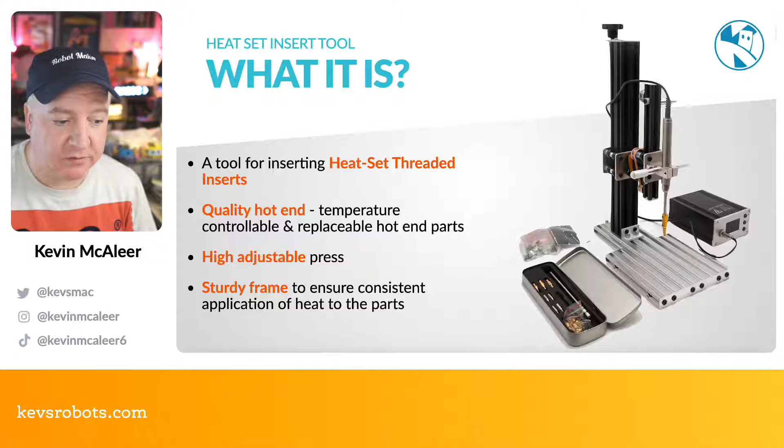So what problems is this trying to solve then? So this is for 3D printed threads. So if you have a part such as, I'll get one of my BurgerBots here, for example, I've got these little motors that I want to connect.

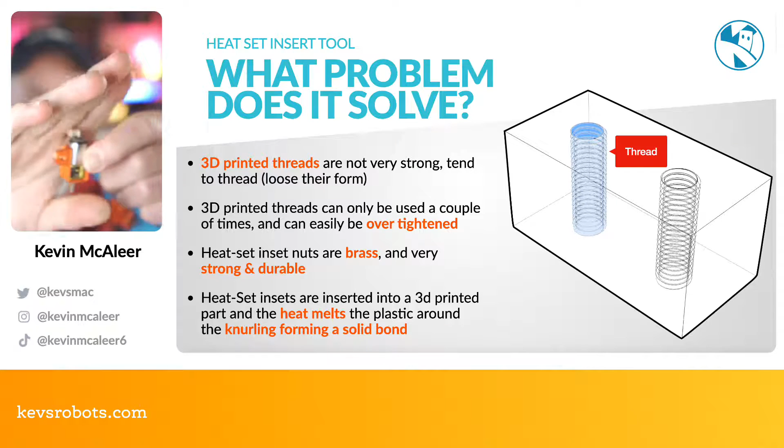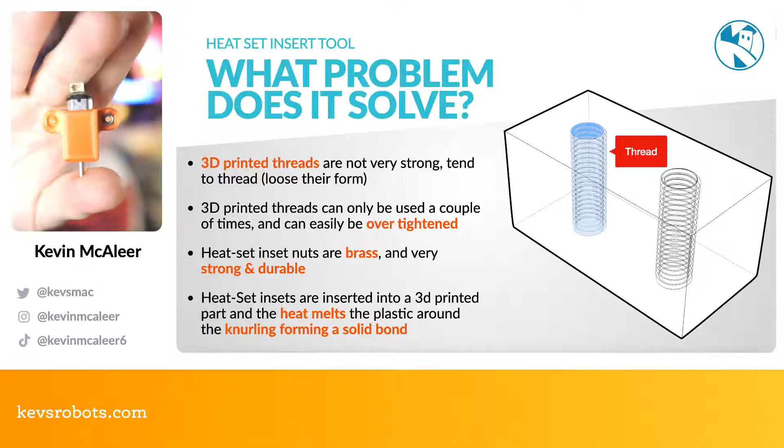There's a motor which you can see there, if I just cover up my face and hold that there. You can see I've got a little motor and I've got a little 3D printed holder part, and it's got two little sort of wing nuts on there, and the idea is that you can put a captive nut into this and then screw this onto something like this BurgerBot base here, so that you can attach a wheel to it. So that would actually be for the other orientation. So you can put this on here and it's got the little wheel thing on there.

So the way that I can connect these two parts together is basically just using a captive nut. So a nut on one side, a screw hole, and then it squeezes the two together. So one of the challenges there is if you don't have the size of the hole correct, then the screw will move around and you won't get a nice join there. Or if it's too tight, you try and squash it together, you can end up cracking the entire lug nut there. So that's not really what you want to do.

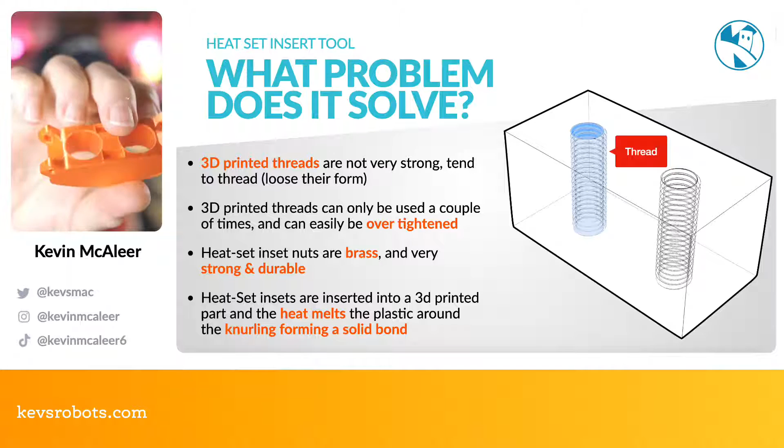And I've had this happen on quite a few of these BurgerBots where I've got these kind of up and down sort of lug nuts. If I just show you that there. So there's holes for those captive nuts, little hex nuts, and the top and the bottom of this attach through using some holes and some M3 screws I think I used for this one.

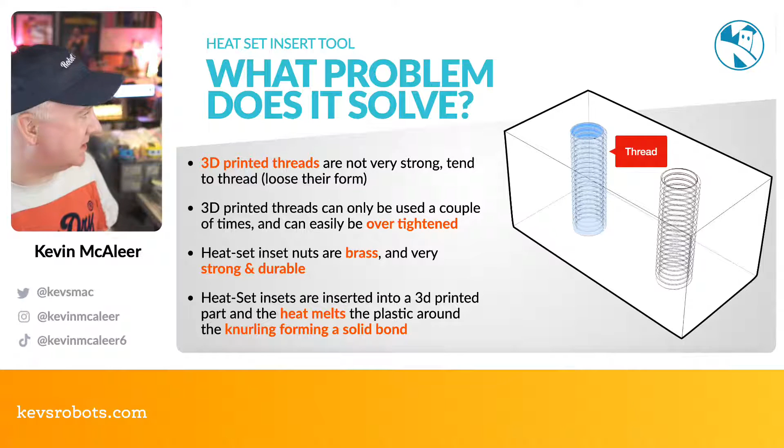So one of the problems with trying to use 3D printed threads: you can tap threads. I've got a tapping tool just on my workbench over there, and essentially you can get a hole with no thread in it, put this brass thing in and it'll create a thread. But threads on 3D printed parts don't tend to last very long. You might get one or two goes at it before you've basically heated the plastic up internally and it's just loose.

So if you want something that you can take off and put on many different times, you want something that's a metal based threaded part. So this will solve that problem by giving you a threaded part that's made of brass, so you can screw that screw in many different times, and it's connected solidly to the 3D printed part. The other thing with the threads, if you over tighten something, you'll essentially just strip the internal thread of the 3D printed part, and again these brass ones will get around that issue. You're unlikely to over tighten it to that extent on a 3D printed part.

So the heat set inserts come as little nuts. I've got a whole bag of different size ones here. So these ones are, I think, M5 ones. So you can just see in there, there's little brass things. We'll have a look at one closer up in a second.

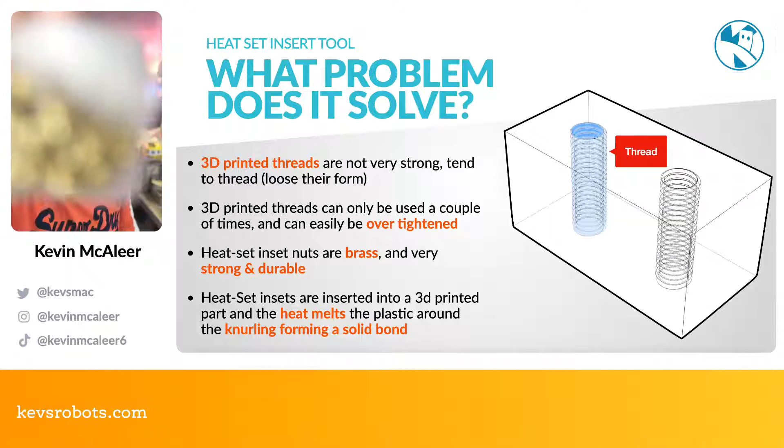You can also get even larger sizes, so I've got a slightly larger bag of them there. And they're very cheap. I think these are the M6 ones. These are absolutely huge. So you can see these ones here as well. So they're getting larger in size. But you can get very small ones too. So they're very strong, very durable, and perfect for, again, putting two different 3D printed parts together with a really solid connection.

And the heat set inserts are inserted into a 3D printed part.

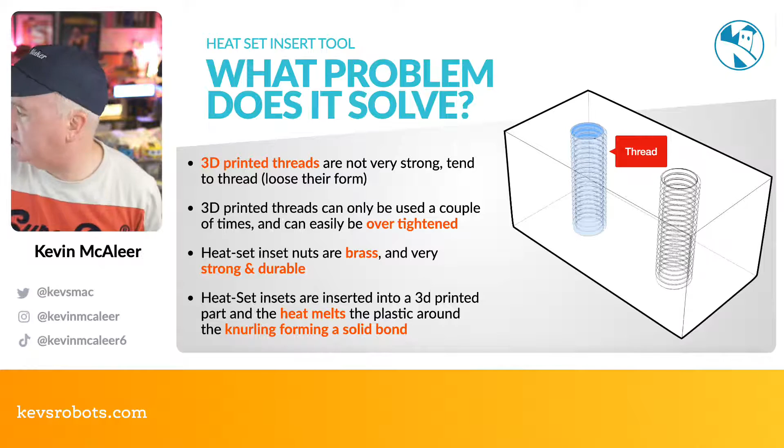And they use heat to melt the 3D printed surround ever so slightly, just enough that the 3D printed filament will come against this knurling on the heat set insert, and it will then make a solid join as it cools back down. It basically forms around it and it doesn't go anywhere. You can't twist it or anything. So that knurling, these funny little diagonal stripes around the edge, form a solid bond with the plastic that they're set into.

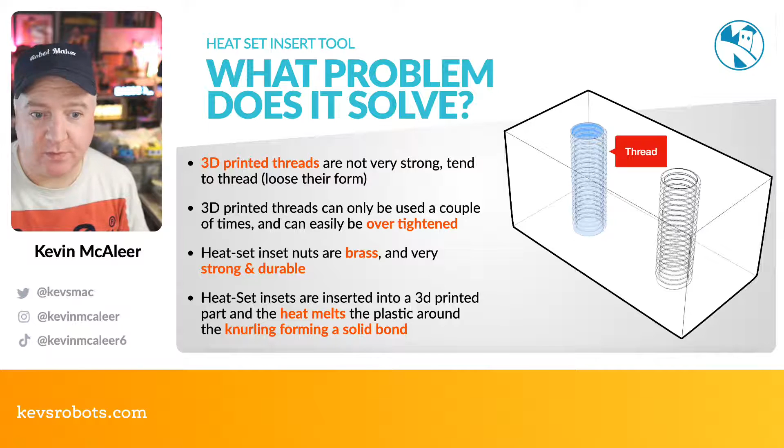It's quite difficult to explain that. I think it's more intuitive when you see it. You're like, I get it. So this is one of these HeatSet inserts. So it's brass, or other types of metal are available as well.

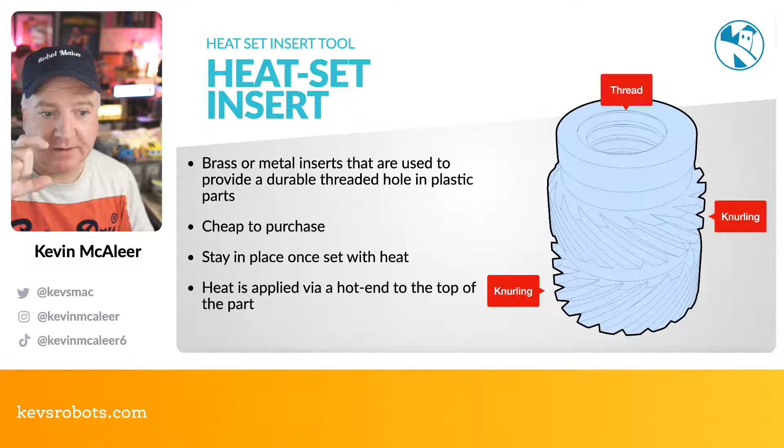And you can see there they've got an internal thread, which is where you put the normal bolt in, and on the outside they've got these knurling patterns, and they've got them in opposite directions so that the plastic, when it sticks to it, it doesn't matter which way you turn the screw, it's going to hold it solidly in place. They're very cheap to purchase in large quantities, and the heat being applied from the hot end basically just touches the part. We can see that on the next slide.

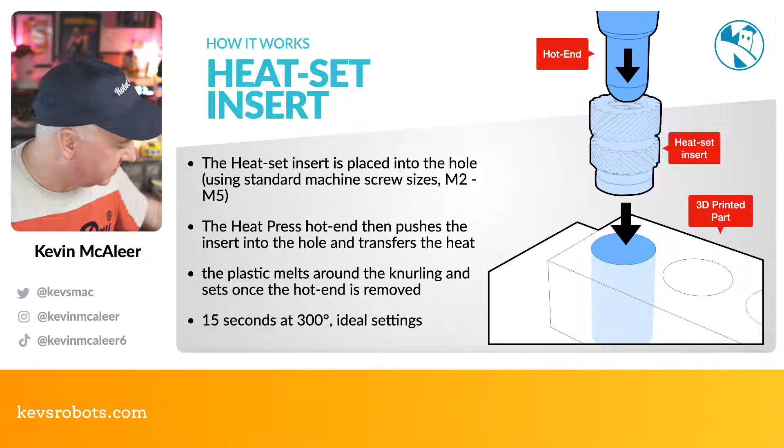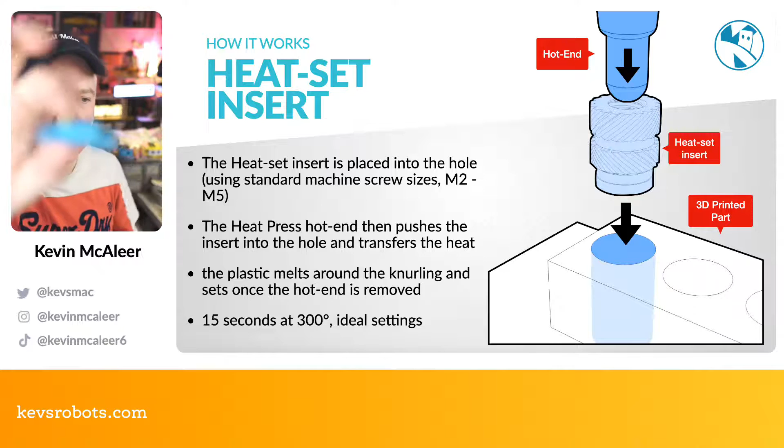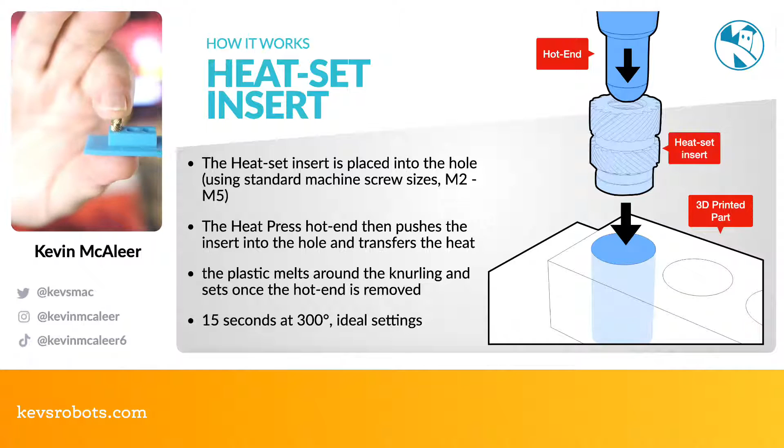So this is how we actually use it. I've got some I've made earlier. Let me just get this little part here. So I've got these little test 3D printed parts with a couple of holes in it, and we get our little heat set and we put that inside like so. We basically just put it slightly inside the part. I need to see if I can do that without dropping it. It's quite hard to do. So if I do that, you can see it's just sat slightly inside, and that's because there's a little piece just above where the knurling starts.

So you put that into the hole, and the hole is the same size as the screw that you would intend to use. So if this is like an M5, the hole is an M5 sized hole as well. And they go from M1.4, I did just drop something then, to I think all the way up to M6, something like that. And there are different sized nozzles, hot ends, that you get with this particular heat press, so you can interchange them as needed.

So you can see there, you put that there, then the hot end comes in and transfers the heat into the little HeatSet insert, and then that pushes very gently, with very little force, to be honest, into the 3D printed part. At that point, it will then lock in place when you remove the heat. It'll sort of seal back up. So the ideal settings there will be about 300 degrees C for about 15 seconds. It's more than enough to heat the plastic.

So Shemi says, can you drop your open box of inserts, please, just for a laugh? That might happen by accident. These ones luckily are all sealed, so that's not going to happen. But I've got a bag that's open. I did just drop one actually, but I've got a whole load of them, so it's fine.

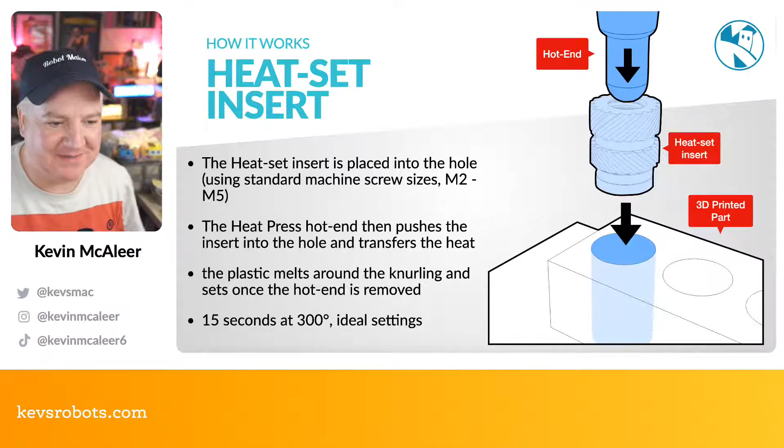So yeah, it's just a transfer of heat, melts the plastic, and then it's securely in place. Very simple. So the accessories box, I've got mine here. It looks like a little pencil case. And in here, as well as some instructions, you've got an Allen key for adjusting the press, and you've also got different sizes of hot end, the sort of nib that goes on the very end there. You can just about see that's a nice brass piece. Nice and solid. There's a couple of different sizes depending on what size inserts you're using.

And there's also, if I can get this out without dropping it, here we go. This is the temperature probe and the thing that actually transfers the heat from the heating element, which goes in the very top. It looks like a pen, but it's essentially like a temperature controlled soldering iron.

So you can see there we've got a few different things. We've got the heating elements for M1.4, 1.6, 2.5. We have another heating element for the M3, 4, 5 and 6. And M stands for metric screws, if you've come across them before. And then we've got the insert tips for the 3, 4, 5, 6, and they're the heat set nuts. And then we've also got the M1.4, M1.6, M2 and M2.5 heat set nuts as well.

And there's also a little bag of accessories, which is just a whole bag of little different sizes of things that you can put in there. So you get quite a few to play with to begin with. Okay, so you can also buy larger boxes of these as well. They're very, very cheap to buy online, and you can get one of these, this is like a 370 piece set from Amazon, I guess.

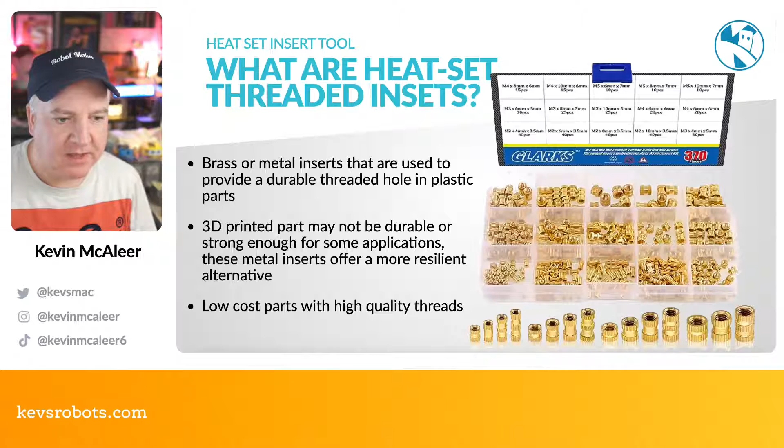They're designed to be inserted once, and then you use them as many times as you like to screw and unscrew. You don't take them out of the 3D printed part once they're solidly in there. They're very, very low cost, like I said, with a very high quality thread in there.

So how to use it: we've got the hot end power supply there. We're going to set this to 300. We're going to do this in a minute on our live demo. Hopefully this all goes well. We switch it to 300 degrees. I think it comes on at about 200. I've tried a few different temperatures.

300 does seem to be the best temperature, even though PLA melts at about 200 to 220 degrees. 300 is the heat going to the hot end nib, and that's to transfer to the brass, and then from the brass to melt the plastic. So the plastic isn't getting the full 300. And we're only doing this for a very short amount of time, up to about 15 seconds.

So we wait for that temperature to be reached. It has a little gauge on there that tells you what the current temperature is. And once it's got there, we can then start using it. We position the part underneath the nib. I've got a camera set up so we can see how all this works. And then we lower down.

There's a little T-bar that you can lower down, and that will make the hot end make contact with the brass inset piece. Once we've done that and it's melted to the correct depth, we can then just remove the thing and let it cool down, and then it's solid.

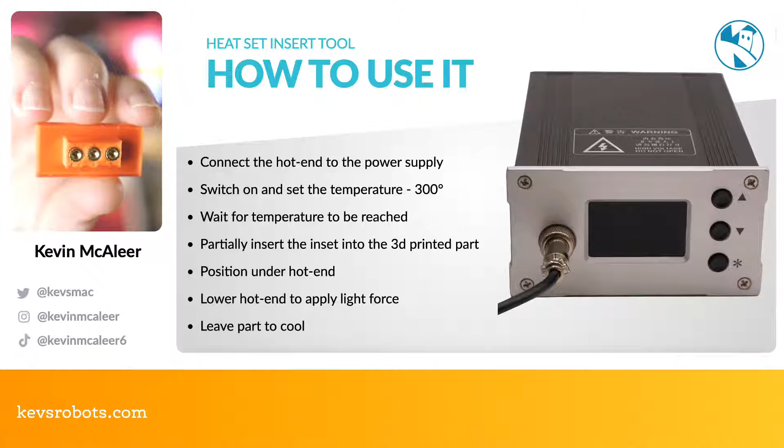So I've tested out a few pieces already. This is my little test rig. What I did on this one is I tested out a 5mm, a 5.1mm and a 4.9mm to see if there are differences in the tolerances and if that makes a difference. And one of the things I found is if you make the hole too small, when you push the part into it, you'll get some of the filament being pushed to the very bottom.

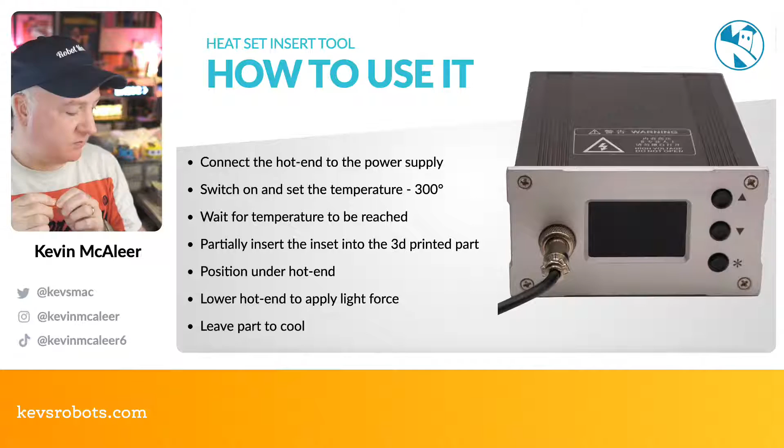So if I show you the bottom of this part, you can see the one on the very right has a piece of red plastic in the hole, and that's because that was the 4.9 hole, so it wasn't quite large enough to seamlessly go in there. But these are solidly in place. I think these are 8mm ones, so the depth of them is 8mm, but they're nice and flush and they're not going anywhere. So I'm really pleased with how that works.

Okay, so who is this for? This piece of kit isn't for everyone, but it is for small industrial users looking to lower the mistakes made by putting these in manually. Like I said, if you don't do this exactly 90 degrees to the part it's going into, if it's ever so slightly off, you'll make a real dog's dinner of it and you won't end up with a quality finish. It's for people who want a quality finish putting their 3D printed parts together.

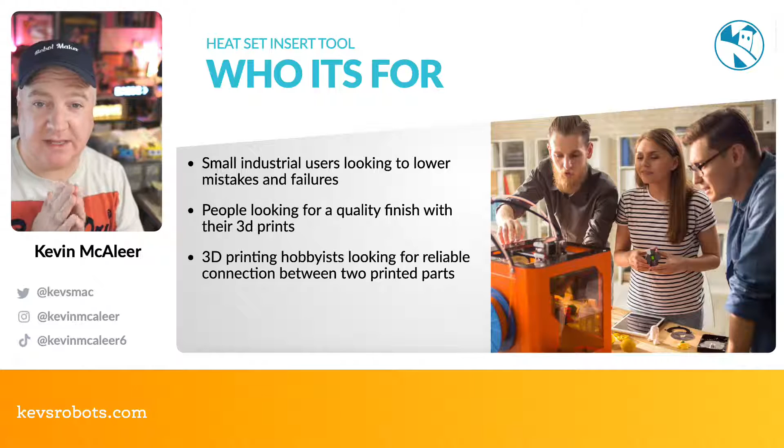So for example, on my burger bot, I like things to be nice and flush, and using captive nuts doesn't always get me where I need to be. So luckily this will solve that particular problem. And it's also for 3D printing hobbyists looking for reliable connections between two 3D printed parts. It's very easy to manufacture this. You essentially just put a hole in there, which is the same size as the piece that you want.

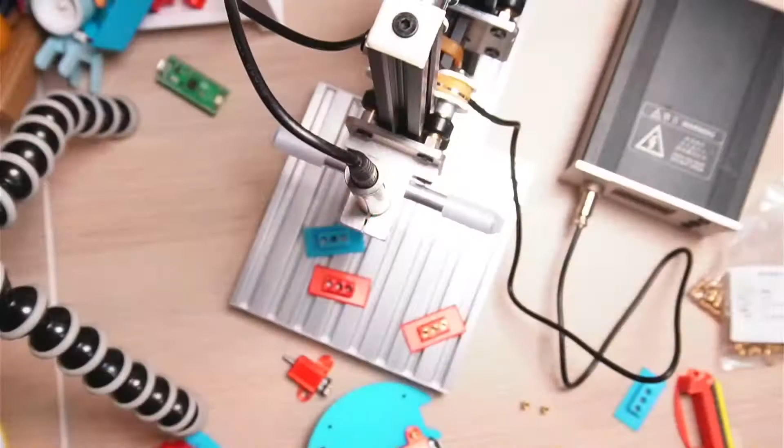Right, let's do this, shall we? So this is the demo. What I'm going to do, I'm going to go to the overhead camera first, so you can sort of see the top-down view of what's going on. If I press this button here, you can kind of get the whole studio. So you can see on this little window just there.

You can see I've got this little camera. This little camera is this view here, which is looking at the heat set. So at the moment it's not switched on. I don't get burned. Just behind that is the little power supply where I can set the temperature. I can also move this about if we need to. You can just see there we've got the little temperature screen, and we've also got, you can see here, this is where you sort of raise and lower the part. So if I pull this up, you can see it goes up and down.

Now interestingly, Naomi was saying that she tried lots of different springs and things so it returns to the right place, and so that it applies the right pressure kind of automatically in a downward way. And the way that she found was best was actually rubber bands, because they're very cheap. You can apply 1 band, 2 bands, as many as you need to get to the right strength. So it's quite calibratable in that way.

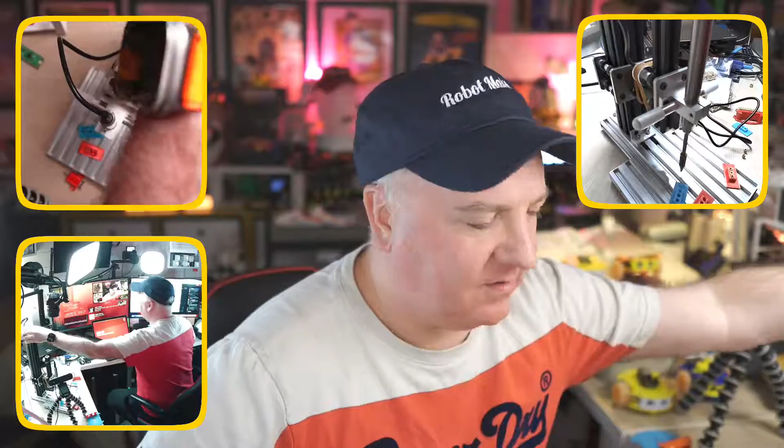The other thing at the very top of the device over here, you can probably just about see that if I just move this forward. That's BurgerBot falling off there. There's a little wheel you can turn, and this will lower or raise the hot end there. So if you look, what I want to do is get that so that it's clear. So I'm just going to make it go higher, and it needs to be quite high so that it can make contact with the piece.

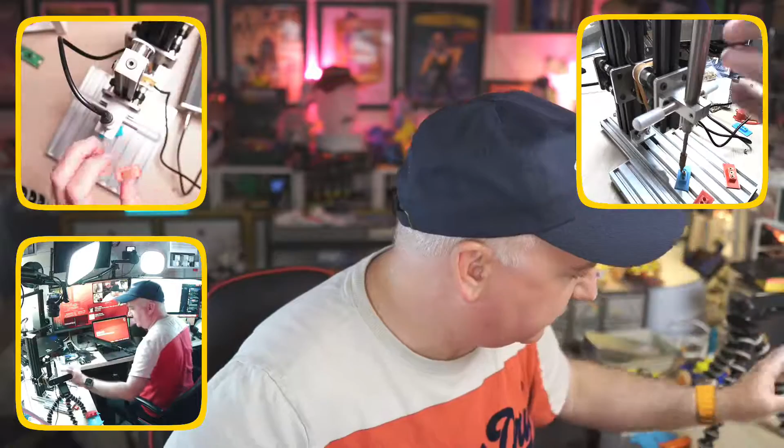So if I drop a piece into here, for example, I want it to be making contact with that piece like so. I actually want it to be the full depth. So if I just put this down to here before we start doing any heat, that should be sufficient. Right, so I can move that out the way there.

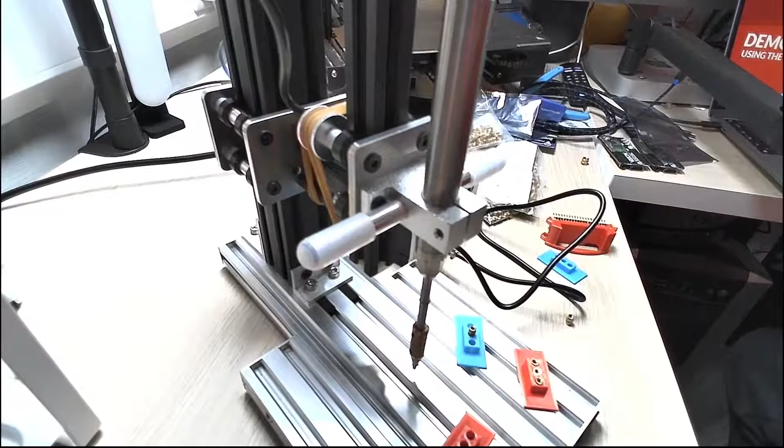And what I'll do, I'll go to this particular view, which is the webcam view. So hopefully you can still hear me. Let me know in the comments if you can still hear me okay. It also gives me a chance to pick this up off the floor.

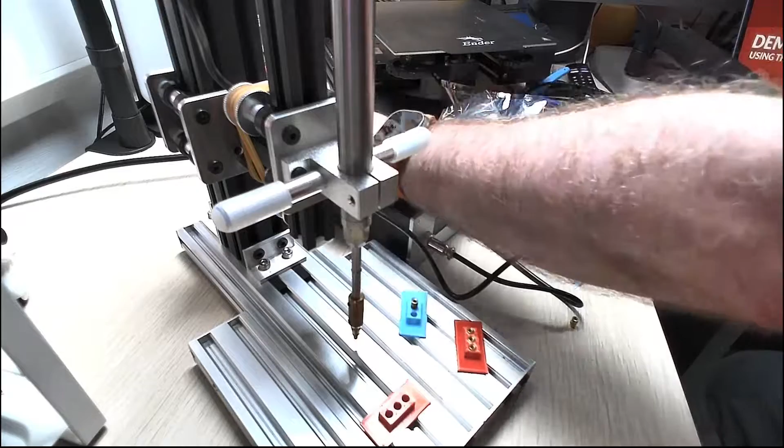Right, so what we're going to do, we're going to power this on first of all. So if I just move this back ever so slightly, you can see that the power supply is just here. So the first thing I'm going to do is just switch that on, and it's gone to 300 degrees, which is actually what we want it to be. I don't know if you can just about see that there. It says 220, 230, 240, there we go, 250.

So it's heating up quite quickly. Let's put that camera back there. And what I'm going to be using is these little T-bars to lower and raise the hot end. So what I need to do, I'm going to be using this red one to put them in place.

So these have got some nice 5mm holes already printed into them, and if I put the little heat set into it, it won't push in so far. The little knurling sort of stops it from going any further in. The holes go all the way through to the bottom as well. So what I'll be doing is I'll be raising this, putting this underneath.

Well, now it's at 300, we can do that. So I'm going to raise this up. I'm going to push this down, basically just under its own weight. I'm just going to let it do that for a second. We need it to be about 15 seconds. If I sort of gently start moving that down now, we'll see if that's going into place.

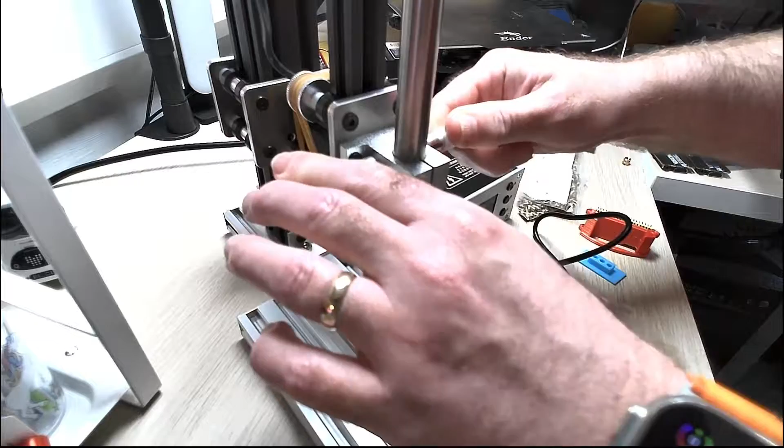So that's now pushing ever so slightly in. It's transferring the heat. I can see it going down. And then it's now about flush. There we go. So if I now move this up, move this out of the way, you can now see that we've got the part where we want it to be. And we can look on the other side. It's nice and tidy.

There's no mess. Let's go to the main host camera and have a look at this a bit better. So if I hold this up here, that's the underside. Look how nice and smooth that is. And if you look on the top side, you can see that that's flush with the top as well. And if I touch that, it's probably still quite hot. It's not burning hot, but it's still quite hot to touch.

So we can do another couple of them just to show you how that works. Let's get another two lined up. Make sure these are the right size. Yep, they look it. So if I do another one there, let me go to the other camera so you can see. There we go. If I get this to that side there, you can see they're sort of sat at a nice 90-degree angle already.

I'm just going to lift up this press. It'll jump back down with the elastic bands, which are basically just pulling it down. So all I need to do is just lift it up a little bit, put it into place, just let it transfer some heat for a second, and then gently push this into place. I don't need to apply very much force. You can see I'm just using my finger there. It's very, very little. We can now do the next one.

So very, very little force. It just goes in like a hot knife through butter. There we go. That's all the way through. Again, let's go back to the main camera, and you can now see we've now got three. And it's very, very quick to do and very nice and tidy.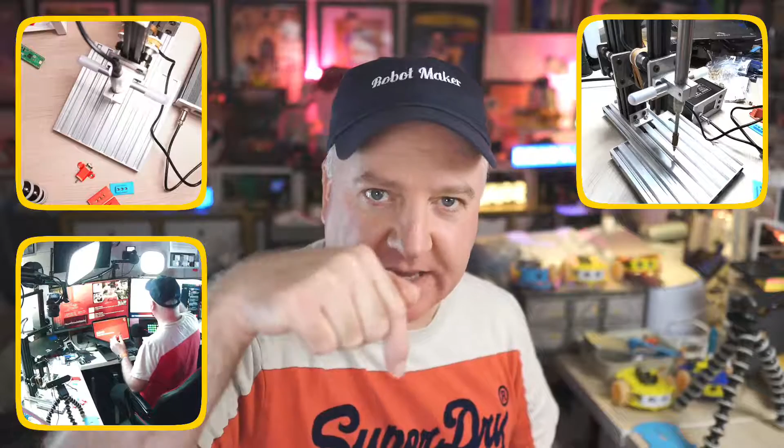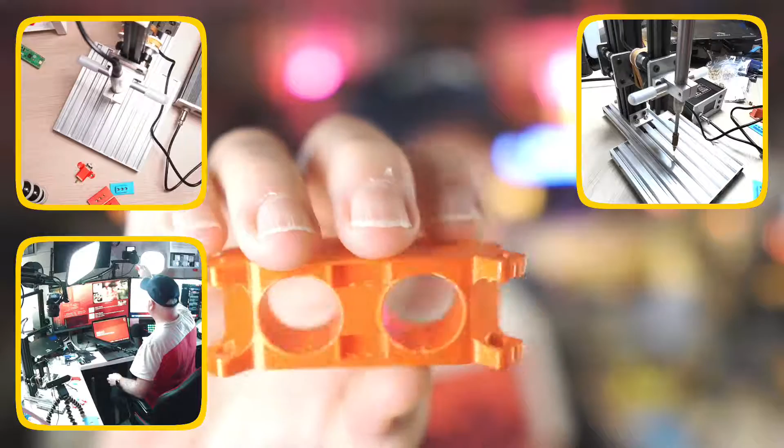You could also get a regular hex screw, like a little 6-sided screw, and just apply some heat using the hot end into that and push them into place on a captive nut, like I have for these Burgerbot fascias. As you can see, they've got these little holes for the captive nuts to go into.

But a better idea is to redesign these so that they use the captive nuts in the first place, or the heat-set inserts in the first place. So yeah, Adam's asking a question: if the hole is not printed properly, the heat-set gets filled with plastic. So it depends on the size of the hole.

So what I did before the show, like I said, let me get this one on screen again. I created 3 different sizes of holes. There's the one, if I hold it this way round, that makes more sense to me. So the one on the very left is exactly 5mm. The one in the middle, it's got a tiny single dot above it. That one is 5.1, so slightly larger, and then the one on the very end, which has 2 dots above it, is 4.9mm.

So that one has a bit of extra material around it that has to get pushed out the way when you push the heat press into it. And what that means is you get that little piece at the very back there. There's a little piece on the right hand side. If I hold it the right way around, you can see it's got a piece of 3D printed filament melted and pushed through, so when we look through it, we don't get a nice clear hole. We'd have to push something through there to get rid of that.

So the best advice is to make the hole the exact size. Don't allow any over or under tolerances for that. So I did measure these with my very cheap, let me just grab these, digital calipers. I'll tell you a very short story about that as well.

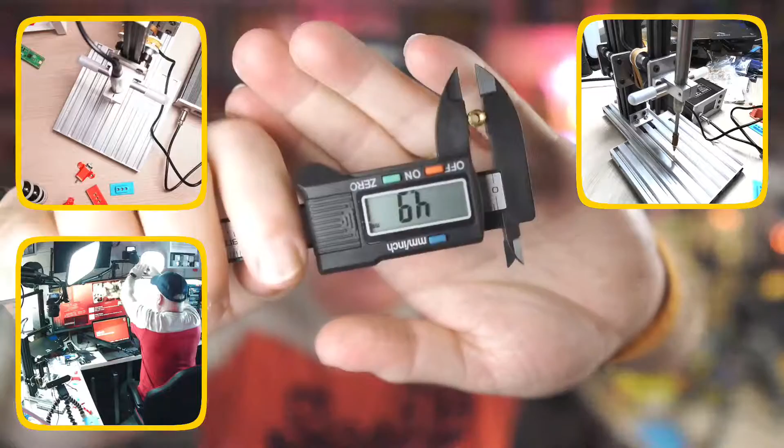So if I now look at the size of that, you can see if I get this to, there we go, 4.9mm is what it's reading. So it's designed to be 5, so they've already built in a bit of tolerance, 0.1 tolerance on the part already. So we want that to be a 5mm hole, and that will work perfectly.

Okay, and you can see how quick it is. So if you're manufacturing lots of parts, say you're making burger bots en masse, for example, you could do this quite quickly. It doesn't take very long. It wasn't even 15 seconds to machine these into place. So I can see that that's cooling down now.

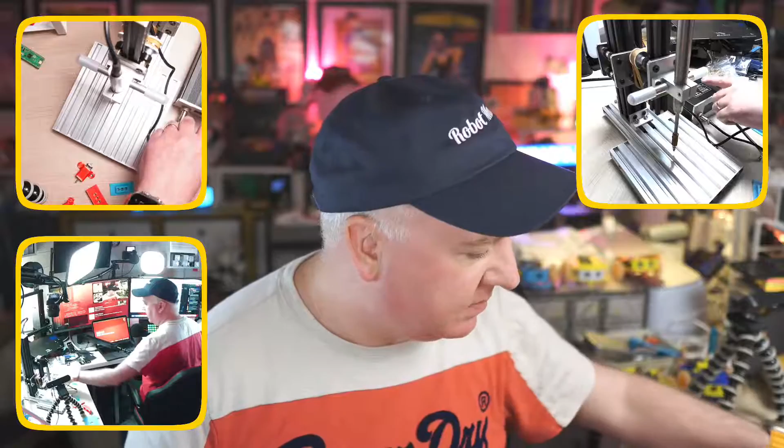So it has this probe on the top there that we can unplug. You can just see there on the cameras, that's what it looks like, and you basically push that in. That's both the power and the temperature sensor going back to the power supply. And the power supply is just like a kettle lead. That's probably the wrong term for it, but yeah, that's it.

And we can use this little dial to raise and lower the heat of the hot end. And once we've used it, we can just put it out the way. I usually just have it at the back of the studio over there when it's not being used. So very, very simple to operate. Okay, so let's get back to our slides and see what else we have.

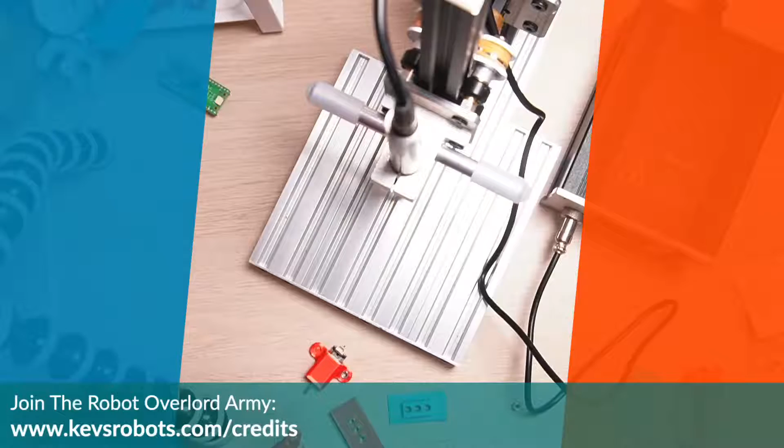Okay, what else do we have? I think we have one more slide there, which is our supporters, of course. So why has it gone to that camera? Let me change that camera back to me. I don't know why I did that.